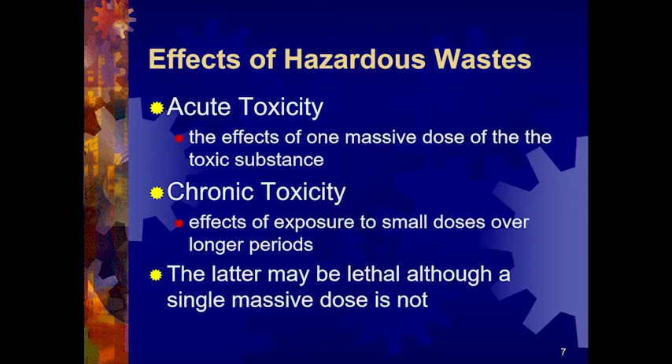In contrast, we have chronic toxicity, wherein the effects of exposure to small doses over longer periods of time is more relevant. Substances that exhibit chronic toxicity may not be harmful at large concentrations, but smaller exposures spread across a longer period of time could be more lethal if the substance possesses chronic toxicity. Okay? So those are the two types of toxicity in hazardous wastes.

Other characteristics of hazardous waste include corrosivity, meaning it is capable of corroding metals by chemical reaction and can cause severe damage to exposed tissue. Now, corrosivity is one subset of reactivity because if a substance is corrosive, then definitely it is reactive. But the term reactivity is reserved for a more general description of the reactive nature of the hazardous waste. So when we say reactivity, it is unstable under normal conditions and readily undergoes violent chemical reactions.

It reacts violently with water and it can also create spontaneous explosive mixtures like toxic gases, vapors, and fumes and are capable of detonating. An example of a corrosive hazardous waste is spent acid waste such as spent sulfuric acid. While spent sulfuric acid can also fall under the category of reactivity, it most certainly falls under corrosivity. Okay, so reactivity is a broader term and corrosivity is just a subset of reactivity.

We have here a list of the most common hazardous waste that we might be able to encounter. First, we have spent halogenated solvents used for degreasing, such as trichloroethylene and methylene chloride.

These are used in some industrial and manufacturing processes, such as in the manufacture of semiconductors. Spent non-halogenated solvents such as xylene, acetone, ethyl benzene, and ethyl ether. These are normally found in manufacturing industries.

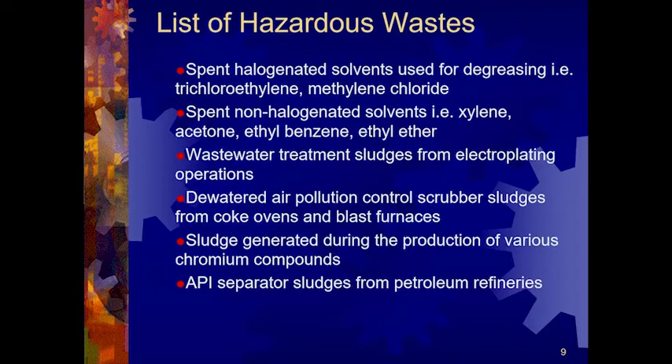Sludge generated during the production of various chromium compounds. This is applicable in the processing of leather. And API separator sludges from petroleum refineries because again, this might contain toxic organic compounds as well as some heavy metals. Now, not all hazardous waste can be found in an industrial or in a commercial setting.

Sometimes, we can also find hazardous waste lying in our household. I have here a list of several products that we use and potentially what kind of hazardous waste can they generate. First, we have plastics. Plastics can generate organic chlorine compounds, which are considered as hazardous waste when they are forced to decompose. For example, when you burn them, the pungent smell that you generate from burning plastics or rubbers are indications of gaseous hazardous waste that are being generated.

Pesticides may contain organic chlorine compounds and organic phosphate compounds, which are very toxic to us. Medicines may contain organic solvents and residues or heavy metals. Paints may contain heavy metals, pigments, solvents, and organic residues, especially for old versions of white paint, because the early versions of white paint used to contain lead, so that's a heavy metal.

Oil, gasoline, and other petroleum products can contain oils, phenols, and other organic compounds, heavy metals, ammonia salts, acids, and caustics. Metals may contain heavy metals, fluorides, cyanides, and alkaline cleaners, solvents, pigments, abrasives, plating salts, oils, and phenols. Leather may contain heavy metals and organic solvents. Those are being used to tan the leather or treat the leather.

And textiles, such as the ones we use for our clothing, may contain heavy metals, dyes, organic chlorine compounds, and solvents. All of these hazardous wastes are coming from the manufacturing aspect of this consumer product. So some of the products that we are using definitely are contributing to our problem of managing hazardous wastes.

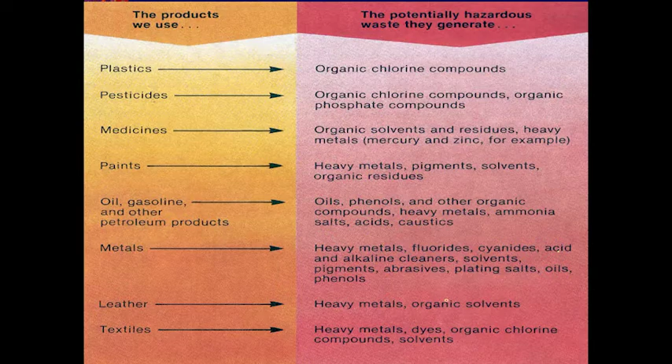Here is a list of some exempted hazardous waste. We have domestic sewage and irrigation return flows. Irrigation return flows may contain excess pesticides, insecticides, and fertilizers, which should make it as a hazardous waste, but normally these are in very dilute levels such that they are no longer considered as hazardous waste. Domestic sewage is also exempted as a hazardous waste since it undergoes its own process, that is the wastewater treatment process.

Mine tailings or the wastewater generated during the processing of ores in mining are exempted from being classified as a hazardous waste, but they are technically a hazardous waste. The only reason why we are saying that they are exempted is because they are covered by a separate law.

By the way, in the Philippines, we have Republic Act 6969 or the Toxic Substances and Hazardous and Nuclear Wastes Control Act of 1990. That Republic Act gives us the framework on how we should handle or treat our hazardous waste. It also provides a classification of hazardous waste, which we have discussed earlier. Animal manures are exempted because they are covered under RA 9003 or the Ecological Solid Waste Management Act.

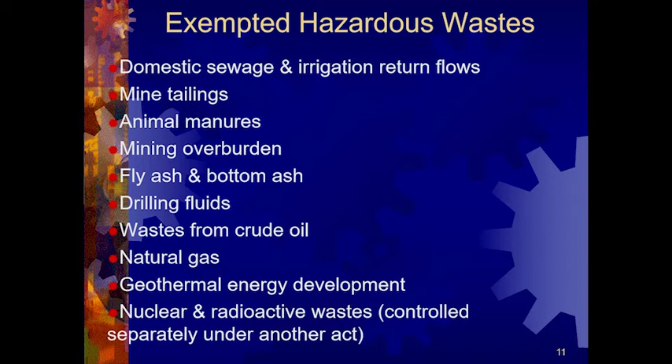Mining overburden, same as mine tailings. Fly ash and bottom ash. Drilling fluids. Waste from crude oil. Natural gas. Geothermal energy developments, and nuclear and radioactive wastes. This is covered by a separate act. These are the type of wastes that are exempted as stated in RA 6969.

So we have garbage from domestic premises and households. This is covered by RA 9003. Industrial and commercial solid waste, which do not contain the prescribed hazardous waste. These are also covered by RA 9003. Materials from building demolition except asbestos. Asbestos is considered as a hazardous waste. So if a building demolition debris does not contain asbestos, then it is simply considered as a solid waste.

Septic tank effluent and associated sullage. This is covered by the Clean Water Act. Untreated spoils from mining, quarrying, and excavation works, but not materials in the nature of tailings, commercially treated materials, and mine facility consumables. This all pertain to the waste of mining industries.

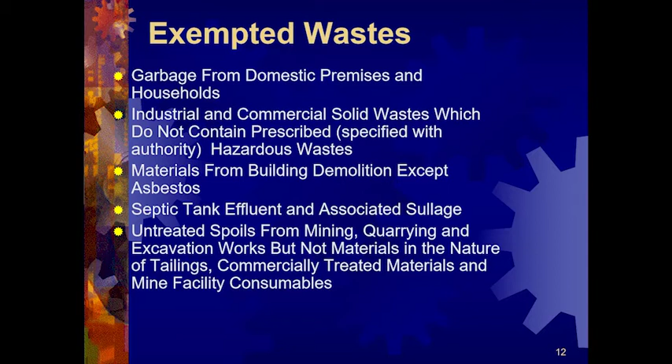This classification allows us to easily identify the type of hazardous waste, and that also helps us in planning what will be our treatment process for the hazardous waste. That's because different classifications of hazardous waste would merit a different type of treatment technology.

For example, you would not want to mix your acid waste with your alkali waste because there will be chemical reactions happening, and if you mix them, you might be able to form more toxic substances. Okay, so we do not want wastes from different classifications to be mixed together.

Also, it is more economical if we separate our hazardous waste for treatment. It is very expensive and very difficult to treat a mixed hazardous waste because that would entail a multi-stage process that would demand more resources, more money, and more energy.

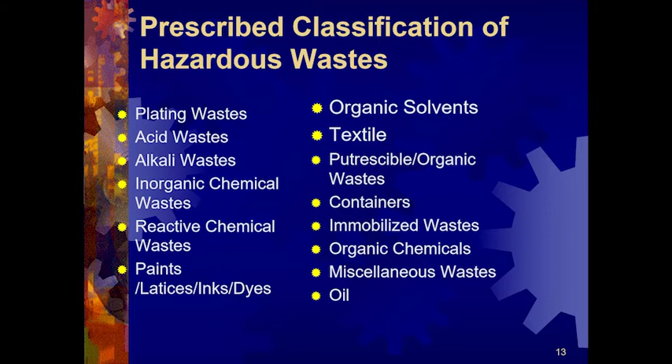Okay? Now, let's talk about how do we treat our hazardous waste or how do we attempt to manage our hazardous waste. According to the implementing rules and regulations of RA 6969, these are the required components of a hazardous waste management plan. Basically, this hazardous waste management plan is required for all establishments that are registered generators of hazardous waste.

For hazardous waste, we have three types of entities: the generator, the transporter, and the treater. The generator is the entity that generates the hazardous waste, and the transporter and the treater are the ones who are tasked to transport and treat the hazardous waste. It is very uncommon for an establishment to be a generator, a transporter, and a treater all at the same time.

So for generators, you are required to have this hazardous waste management plan, and this involves preparing an inventory, waste minimization, storage and transport, spillage, treatments, and disposal.

Preparing an inventory involves the proponents characterizing and quantifying how much hazardous waste is generated and what are the components of the hazardous waste. Okay, that is very important information for both the transporter and the treater so that they can determine what process they need to perform to treat the hazardous waste.

Waste minimization, if you'll remember in our waste management paradigm, the inverted pyramid, waste minimization is at the very top of that pyramid, meaning that it is our number one priority. Waste minimization is especially important for hazardous waste management because it is very expensive to handle and treat a large volume of hazardous waste. So by minimizing the amount of waste being generated, you are also minimizing the amount of resources that you have to place into the treatment and disposal of hazardous waste.

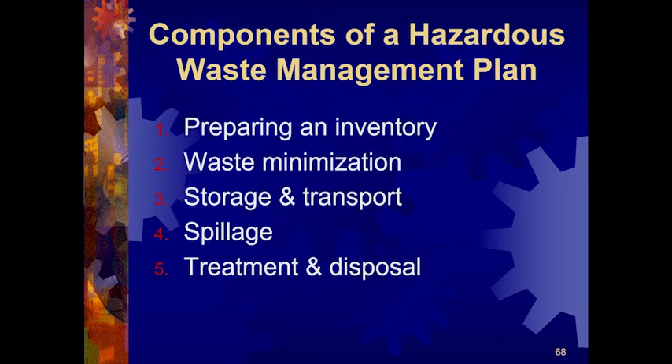Again, let me refresh you of the inverted pyramid for the hazardous waste management hierarchy. So this inverted pyramid is applicable to both solid and hazardous waste. For hazardous waste, there is so much benefit that we can obtain if we practice source reduction or if we practice waste minimization at the very top of the process, because that makes everything below it easier.

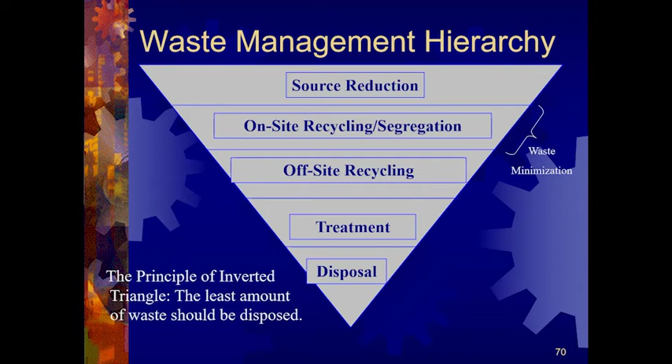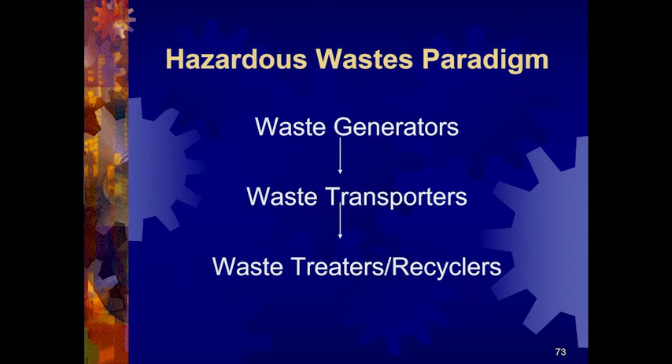That means that you have less wastes to recycle, you have less wastes to treat, and you have less wastes for disposal. As I have mentioned earlier, we have three entities in our hazardous waste paradigm. Those are the waste generators, the waste transporters, and the waste treaters or recyclers. The waste generators are paying both the transporters and the treaters in order for them to take care of the hazardous wastes of the generators.

Here are the duties and responsibilities of the waste generators. First, and the most important, determine if the waste are hazardous waste. Because the last thing you want as a generator is you sending normal solid waste for hazardous waste treaters to treat. That move is a big waste of resources and a big waste of time. So waste generators need to determine if the waste that they are handling is hazardous or not.

Another responsibility is they need to register as a waste generator. There is an online form provided by the EMB, or the Environmental Management Bureau of the Department of Environment and Natural Resources, that designates waste generators with their separate identification. Okay? So one generator is provided with a unique identification such that should there be any problems, it would be easy to trace who the generator is.

They also need to prepare a prescribed quarterly report form, which dictates the volume of the hazardous waste that they have sent for treatment and if those wastes have been treated properly. Waste generators are also responsible for the proper storage and labeling of wastes, the guidelines of which are provided in RA 6969 and its implementing rules and regulations.

They also need to submit the contingency or emergency plan. This is the spill plan that we have been talking about earlier. Basically, this is what the company will do should there be a chemical spill or should there be an accident or an emergency during the storage, transport, and treatment of the waste. And they also need to conduct personnel training.

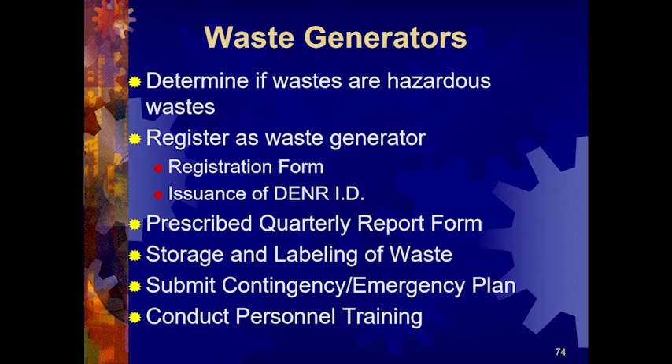For the waste transporters, they also need to be registered with the Environmental Management Bureau as an accredited waste transporter. Transporters are also required to have their own fleet of hauling trucks. And those trucks have specifications as to what is the minimum and maximum size, what tools or implements need to be on board, and other specifications. The waste transporter also serves as a bridge between the waste generator and the waste treater.

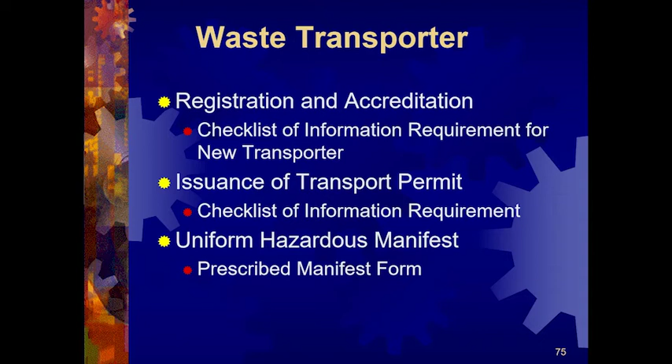Waste transporters are also required to submit a prescribed manifest form. Basically, this is an online manifest which lets the authorities know at what stage the hazardous waste is now. Finally, we have the treaters and recyclers, or the treatment, storage, and disposal facilities. These are the TSD facilities. These TSD facilities need to secure an environmental compliance certificate, or an ECC. Basically, the ECC is required for all heavy industries. We will be discussing more about ECCs when you reach the Industrial Waste Management course.

TSD facilities also need to be registered with the EMB. They must also submit the certificate of treatment to the waste generator such that they will have a document that will attest that this waste has been treated. Okay? And they must also be submitting reports to the EMB periodically to check their performance of treatment.

Finally, let's power through some of the available technologies for the treatment of hazardous waste. Now, keep in mind that these treatment strategies will only work for a specific class of hazardous waste. That's why it's important for us to separate and segregate hazardous waste based on their classifications. One of the most common strategies that is being used by industries that are within driving distance of each other is the waste exchange. A waste exchange is possible if one industry is near another industry, wherein the waste of the first industry is usable by the second industry.

In this waste exchange scenario, the hazardous waste that is being generated by one entity is used as a raw material of the other entity, thereby greatly reducing the generation of waste and improving not only the profitability but also the sustainability of the process. Another technology for the treatment of hazardous waste is solvent recycling through off-site distillation. This is often used for solvents that are mixed and need to be separated before they are reused again.

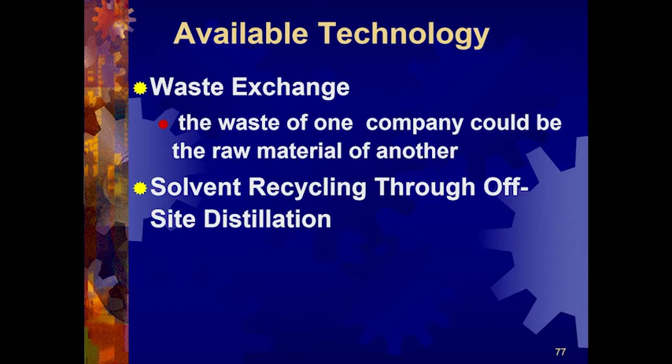Let us focus on the destruction of toxins, such as thermal treatments. You are simply heating the hazardous waste. Also, we can employ the immobilization of toxins, wherein the hazardous waste is simply encapsulated in an inert material.

We have cementitious or pozzolanic, wherein the waste is enveloped into cement and then that is disposed in a sanitary landfill. You can also envelope the waste in an organic polymer, and you can also enclose your waste in glass through vitrification or glassification. Normally, we use pozzolanic and vitrification for the containment of radioactive waste and other types of special hazardous wastes.

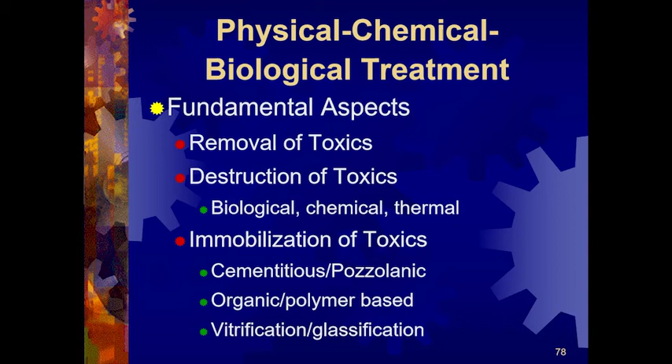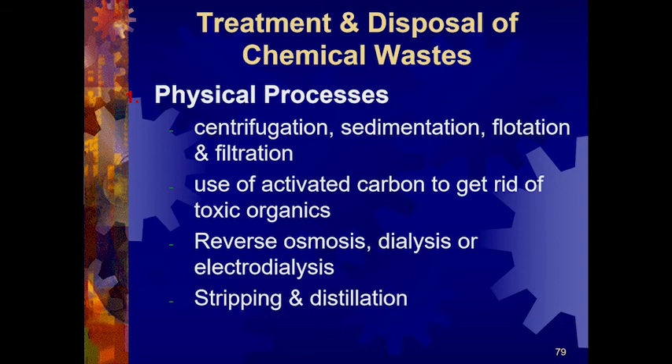Some of the physical processes employed for separation include centrifugation, sedimentation, flotation, and filtration. This is useful when separating small particles from fluids, such as solvents and wastewater. Chemical processes such as oxidation, reduction, and precipitation. Precipitation is mainly used for heavy metals because heavy metals often are insoluble with their sulfides, carbonates, and other insoluble salts.

Reduction is normally being employed to convert a very harmful form of the metal to a less harmful form, such as from chromium 6+ to chromium 3+. Chromium 6+ is a known carcinogen, while chromium 3+ is relatively harmless.

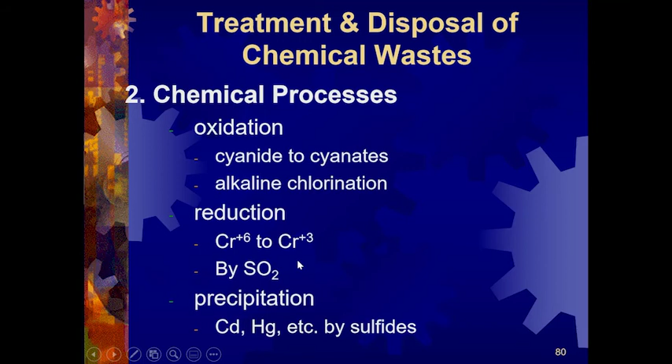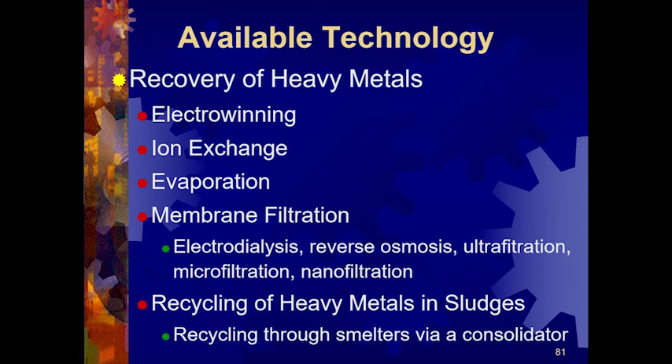We also have the following technologies for the recovery of heavy metals, such as electrowinning, ion exchange, evaporation, and membrane filtration. We also have spent acid regeneration, wherein it has the capability to recycle our spent acid waste. The spent acid waste is treated to generate more of the fresh acid, such as sulfuric acid.

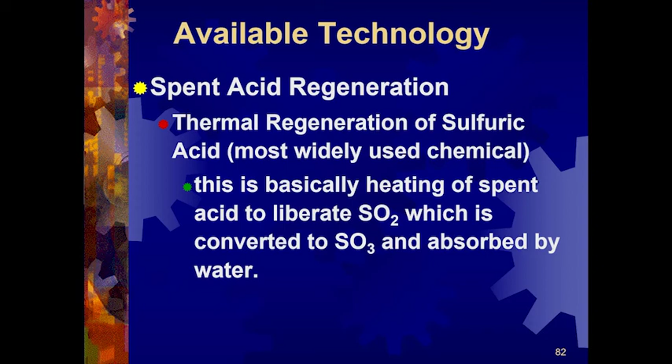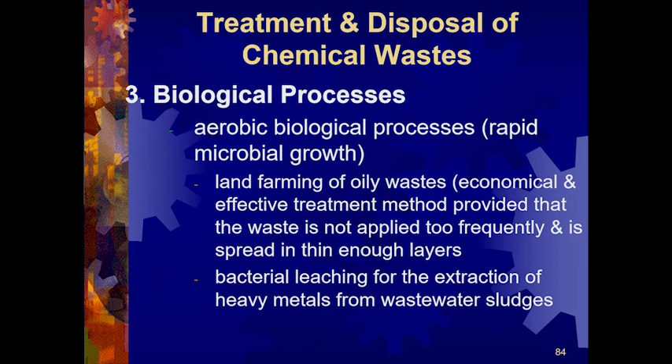For biological processes, we have aerobic biological processes such as aeration. Sometimes we can also employ bioaccumulation or land farming such that we can concentrate the hazardous waste using bacteria or fungi or plants such that we can then dispose of the concentrated waste.

And finally, we have incineration. Incineration is one of the most common processes employed for the treatment of hazardous waste because it is easy and economical. Incineration is the thermal oxidation of organic matter into CO2, H2O, and inert ash.

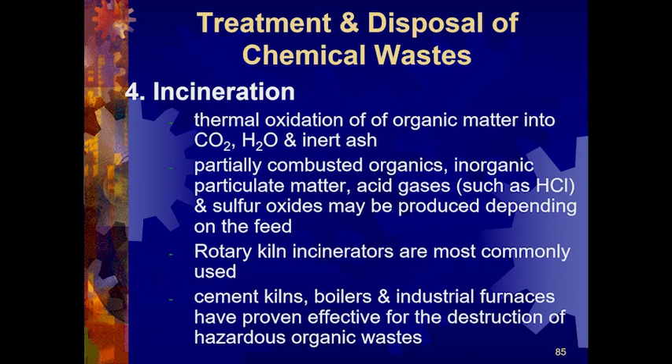Now, you can think of incineration as a simple burning of substances, but incineration is actually more of a controlled burning. For incineration, we are normally supplying pure oxygen into the process to enhance the burning process. And modern incinerators nowadays are fitted with pollution control mechanisms that prevent the release of unwanted substances into the air.

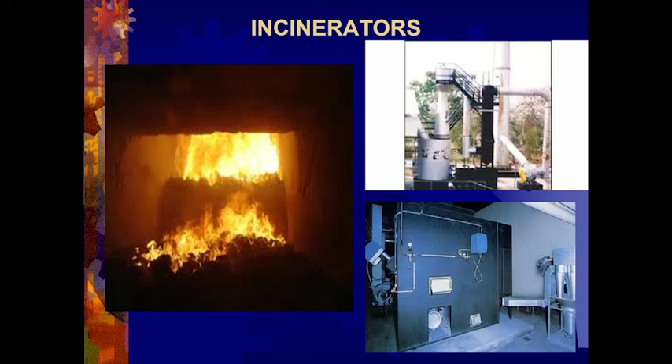We have dioxins and furans. These are generated when you are burning plastics; mercury; semi-volatile metals, or metals that can combine with gases; low volatile metals that are part of the ash; particulate matter that can also be part of the exhaust; hydrochloric acid; and chlorine gas. These are just 7 of the most common pollutants coming out of the flue gas or the exhaust of the incineration process. So we do have to watch out for these substances.

Modern incineration processes are equipped with pollution control mechanisms that prevent the release of these harmful substances. Incineration has long been banned in the Philippines because of the negative effects of its effluents. But now that we have effective technology for mitigating the pollution caused by incinerators, don't you think that now is a very good time to reconsider our ban on incineration?

We have a very big problem in terms of solid and hazardous waste handling, and the lifting of the ban on incineration, provided that there are safeguards in place to protect human health and the environment, can be a big help in our waste processing industry. So that is just some thoughts for you to ponder on as we end our lesson. This is the end of our lesson on hazardous waste.